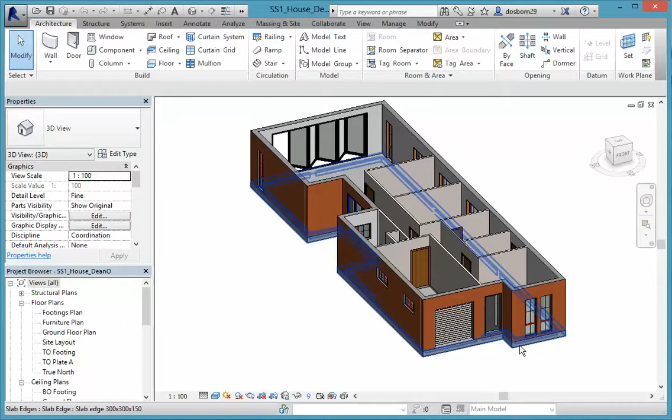Go back to ground floor, zoom in on that front porch area. You have your control joints in here from before, so I'm going to run it from that control joint over to this corner here. We just want to put a floor in, and instead of picking the 100mm concrete slab, remember we had one called 100mm slab tiles. I'm going to use that one, which will give us a nice tiled effect on the house.

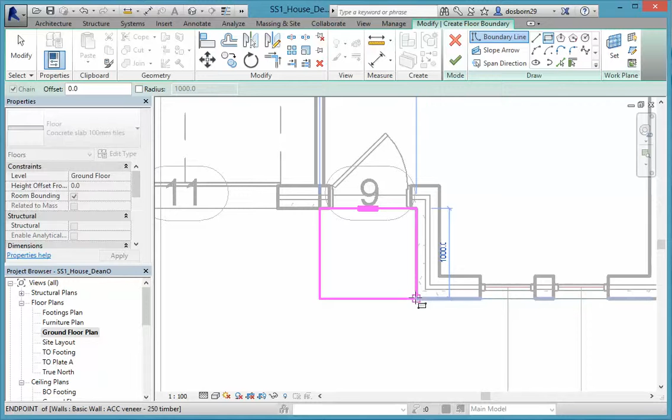Now I'm going to come up to my tools, pick rectangle, snap to that corner and drag it over to that corner there. Just make sure you are on ground level because we want it to be level with the floor in the house. When you think you've got that right, just click on that and then we can go in and check, have a look at that. It's floating up there in the middle of space at the moment, but when we put some topography in, some ground in, that will actually be level with the ground. So don't worry about that at this stage.

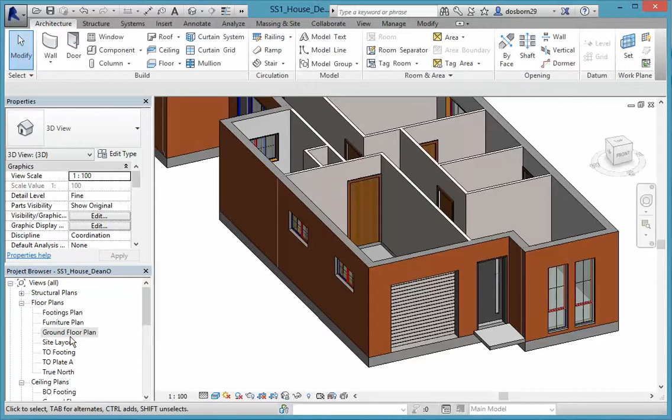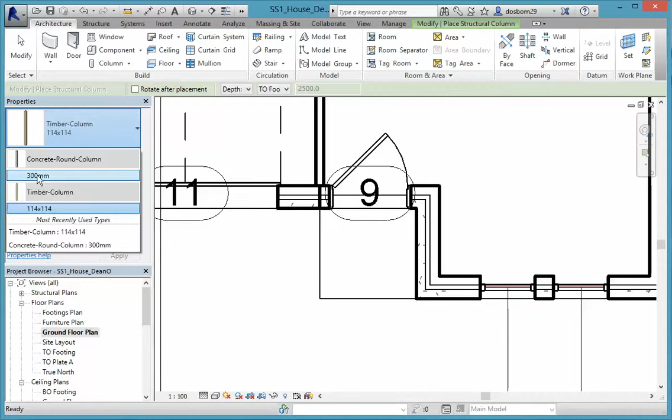The next thing we need to put in to support our roof is a column. There's lots of different columns that we can use, but we're just going to use a simple square timber column on this, just in from this corner here. You'll notice up in your architecture you have a list of columns, with architectural and structural options. Let's go for the structural column. We've only got a couple in there, a round one and a square one, so I'm just picking the square one.

And I'm going to zoom right in on that corner. I just want that just in a little bit. It's not actually giving me any measurements - I could get quite technical with that, but I'm not going to. In fact, I will put it right on the corner, I think. Now it brings a little message up down here saying it can't see any of those things, so that's fine. When you come out of this you'll see what I mean.

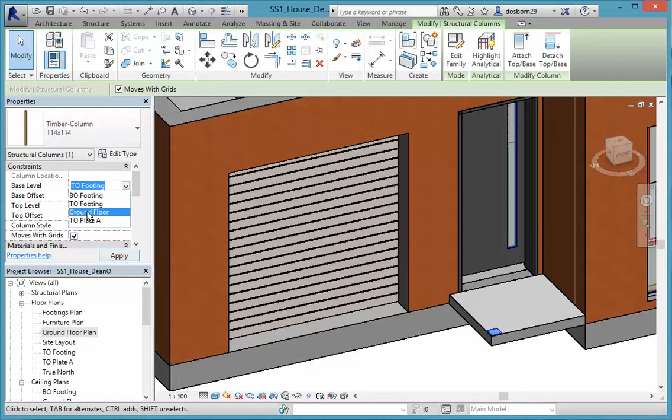If we just close that off and don't click it again, hit escape a couple of times and come out and look at the 3D view, you can see on the corner there you've got just this little tiny shape here. So if we click on that, we can come in now and you'll see that base level is top of footings. We want it actually at ground level, and we want the top level at top of plate. And there's our post gone in up there.

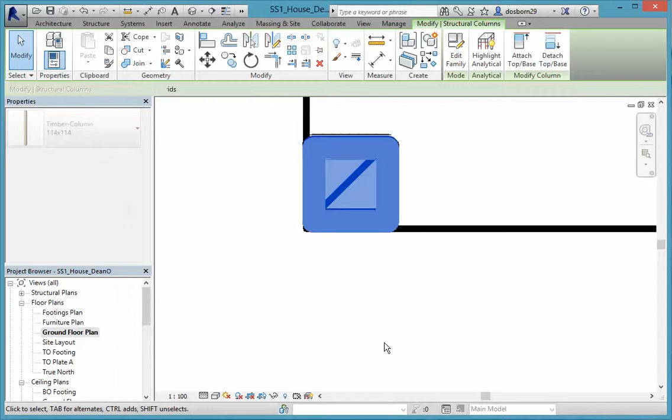Now put it right on the corner there because we'll be bringing the roof across on this line here, and if that was back a little bit that roof there would be crooked. We don't want that to happen. In fact, if you go back into your ground floor, you should be able to just move that around so that you can get it right. Just use your down arrow key to get that right on the edge there. I'm just using the keyboard arrow keys to get that right on the edge, and now we have our post in place, and you can see the tile floors showing there as well.

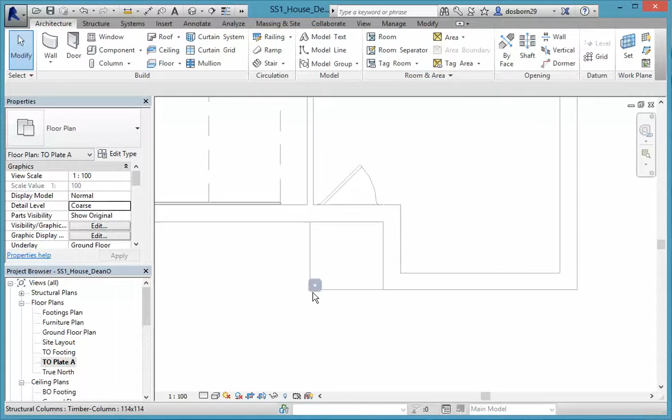Okay, so we're ready to put our roof on, and this is probably the easiest thing to do. I'm going to come into top plate A - not sure why that one's showing up quite thick like that, but we'll see how we go with it.

And we want to put a roof in, so we'll come up into architecture and roof, and I'm going to pick this basic roof, wood rafter, 8-inch asphalt shingles, insulated.

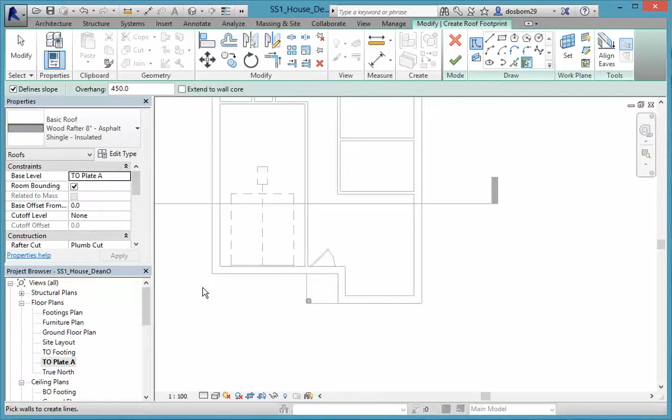We'll have a look at roofs a bit later on during the lesson to show you how you can make your own roofs up, but at this stage we're just going to use this one that's available for us. Make sure you put the base level at top plate, otherwise you'll have the roof down on the ground floor. You will be able to move it up if that happens, so don't worry too much about that if it occurs.

You'll notice we've got our same sort of modifying or creating box up here with our cross and tick, and I'm going to come in and use straight line because I want to go around this. If I follow the walls I could follow it, but I want to come out to this point here, so I'm going to use straight walls. I'm going to give it an offset of 300, which means there'll be 300 out from the wall.

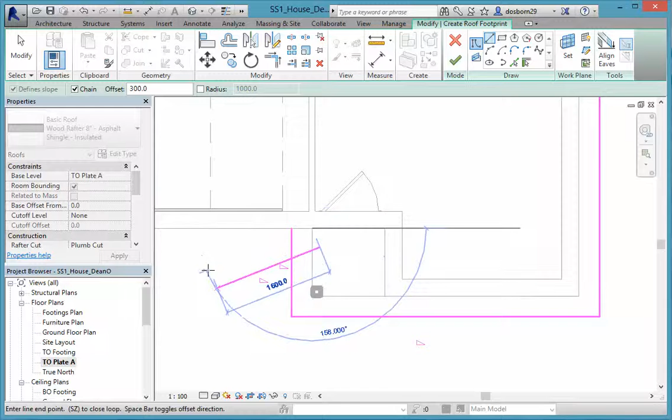Remember to put that in after you've selected the line - you can put it in before, but put it in after. Leave define slope on, leave chain on, and starting from this corner here, I'm going to work my way around the house, just clicking on the corners of the house. And this one here, I'm going to click on the corner of the post, come back to my control joint there, and go up to this point here.

Now I'm going to come in and make a little gap here so the sun can shine into that door on that side. And again there, and up to my final point. Double hit escape a couple of times to come out of that. Just check that that's all nice and straight - now it needs to be parallel to your walls. If it's not looking like that, then you've got some problems. If you think it's okay, give it a tick.

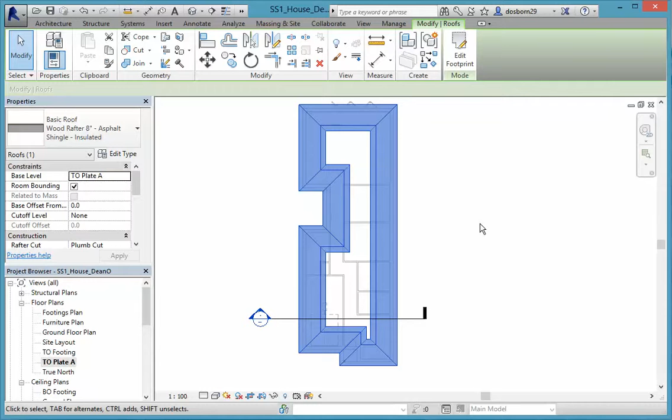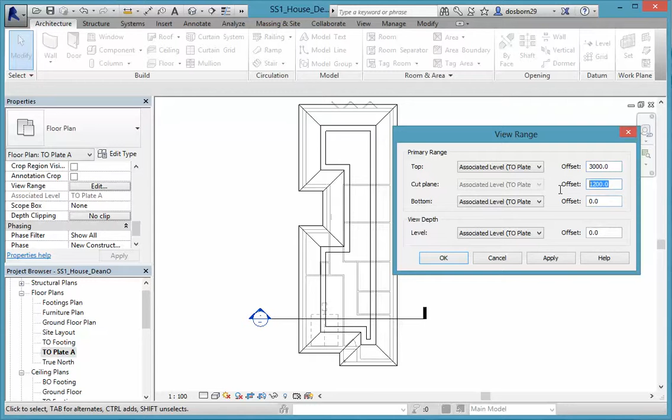You can see that when we're in top plate, we're getting that roof cut off like we saw in the exercises. So what I suggest you do, you just come into top plate - don't want to be in that floor plan - and just come down and edit that view range. Just put the top up, maybe let's try 3000. We might not be in the right one here - we'll try that 3000 on that one as well. And there we go, so we can OK that.

When we come back to ground floor, obviously that roof will disappear - you won't see that roof in because our cut plane is lower. So there's our roof, a hip roof in. But if I look at it, I've got this weird thing happening here with all these slopes, and it dips down, and that doesn't look very good at all. You could leave it like that, but it looks a bit funny. So what I want it to do is come straight across here and just go around that area there.

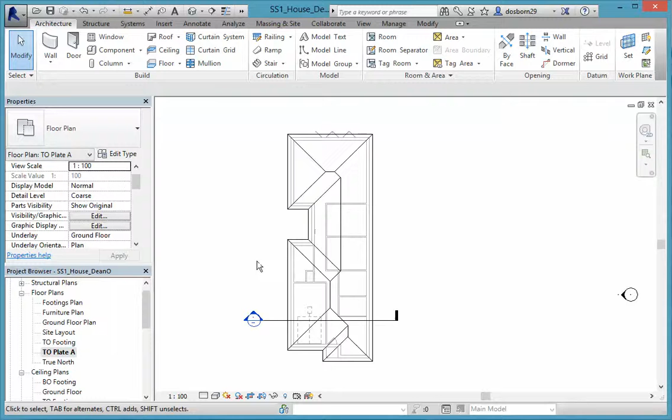Now from your exercises you should know how to fix that up, but I'll just go through it again. Just come into top of plate, I'll select the roof, and I want to edit the footprint, and I want to take these define slopes off of this one. So I'm just going to highlight all of those using my control key, and come over into where it says define roof slope and untick that. They all disappear - like it, click the tick again, and come up and have a look, and you can see now that we've got that.

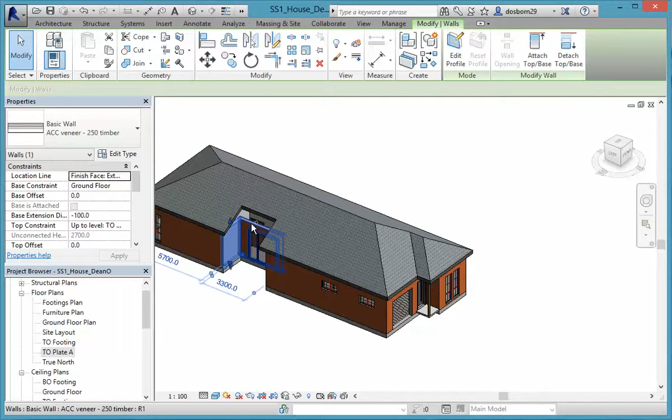We will, however, have to raise our walls up. So I'm just going to select that wall, hold the control key down, select that wall - I can't reach the other one at the moment. Attach, and attach to the roof - so those two have gone up. Swing it around and just do this last one on this side. Attach. Select the roof, and up it goes.

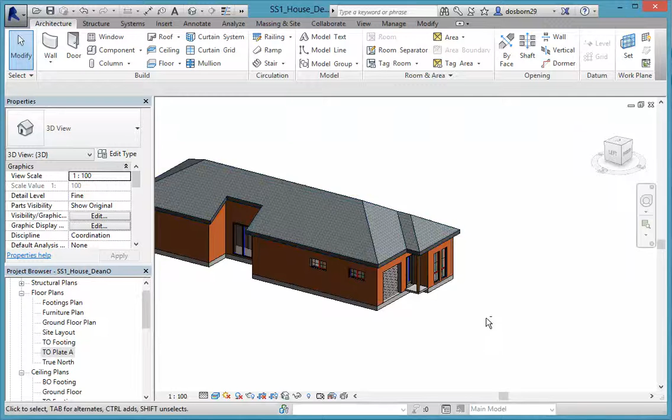And now we have that nice little courtyard effect there - we might put some rafters on across here later on. And we also have our post holding that veranda section up here. You can see how our hip has come across there, so it looks nice and neat.

Okay, so have a go. Remember, you can use any roof type that you would like, but remember we do want to have some sort of little porch around here. I'll leave it up to you to experiment with that, to try some different things out. If it's not working for you, come back and use the hip one, but I'd certainly like to see some different ones from everybody.